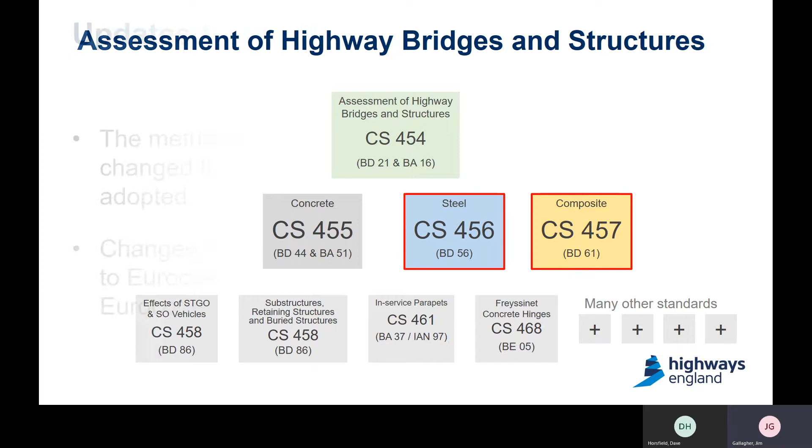The updates to BD56 and 61 didn't require major technical changes. The methods and requirements are largely unchanged or slightly tweaked to allow more general approaches to be adopted. Both documents include greater references to Eurocodes, and this will facilitate an easier transition to Eurocode assessment standards when they are published some time in the future.

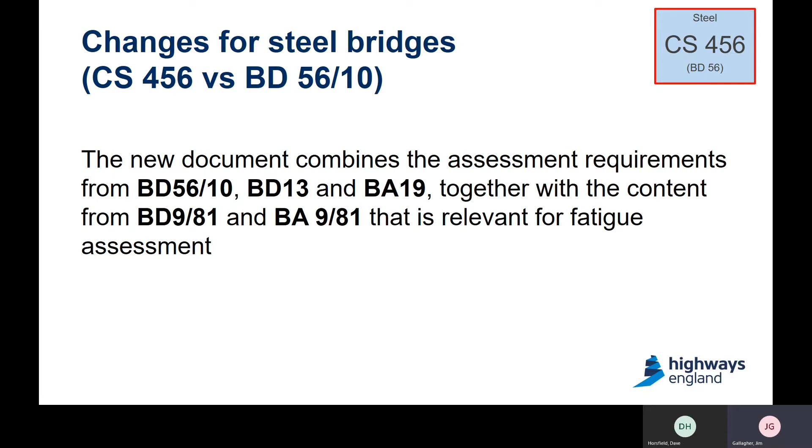CS456, the standard for steel bridges, contains a number of clauses and requirements taken from a number of previous standards, BD56, BD13, BA19, with specific extracts from BD9 and BA9 pertinent to fatigue assessments. The format of BD56 originally supplemented or amended clauses within BS 5400 Part 3. So it's been necessary to retain this link and mirror the styles on that.

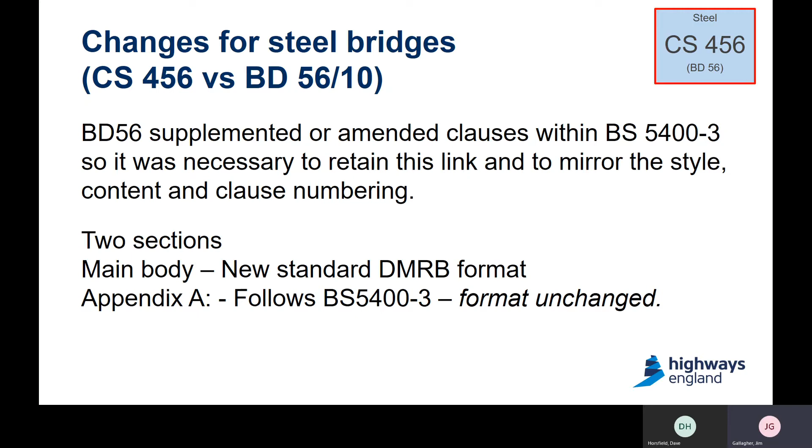And therefore the new CS456 has two main sections, a main body, which follows the format of the DMRB, and the Appendix A, which is largely unchanged from the previous version to integrate with BS 5400 Part 3. Some key technical changes on this. We have added some criteria to look at robustness, as part of the particular assessment standards. With notch toughness, we have strengthened the advice with regard to welds. They weren't previously covered by the standard and could have been overlooked.

Bearing stiffeners: BD56 was much more onerous than 5400 Part 3. Full bearing loads were used instead of the middle third, which is used in 5400 Part 3. This clause now follows the 5400 Part 3 requirements, except where the bearing stiffener needs to retain the stiffness over its full length, for example, as part of a U-frame restraining the compression flange. And with regard to criteria for inspection, we've consolidated the information in Annex I.

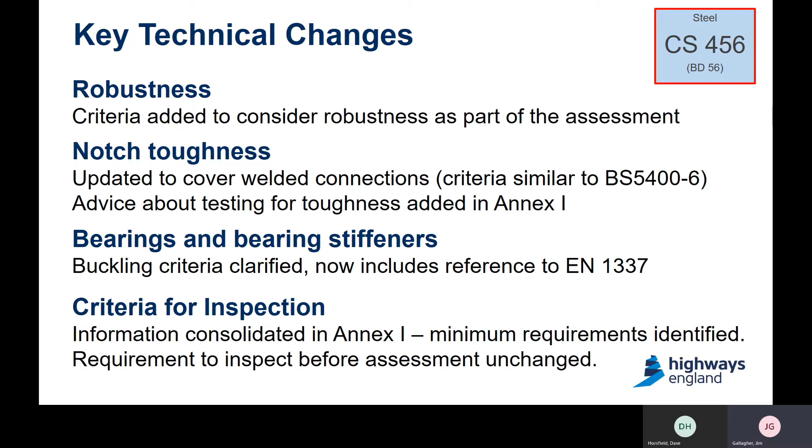We have also added and consolidated information on managing existing welds. The focus primarily is on the requirements, and those haven't changed at all. We're looking at a basic requirement to visually check the weld, concentrating on welds in critical tensile areas, which have to be visually inspected to confirm the minimum weld size, and we have added criteria for the critical tensile areas to be re-inspected and subject to NDT.

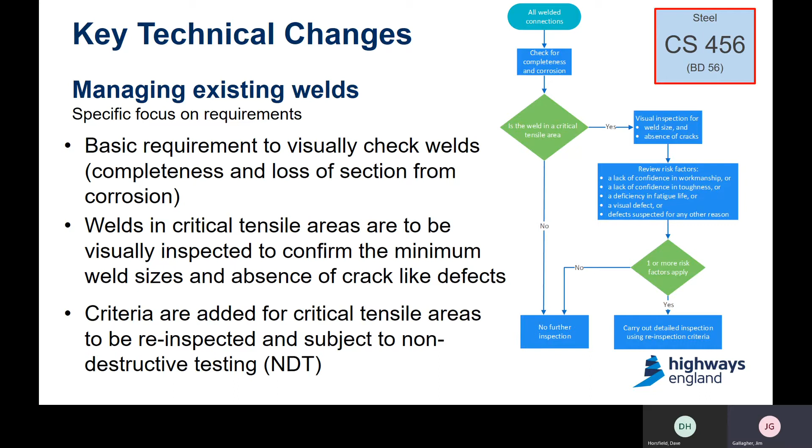Some of the methods in BD56 for crossbeams have been edited to improve usability, and a big addition to this is some additional clauses to allow for finite element analysis. We've also tweaked and simplified some of the language to allow it to be more easily applied, and removed the conflicting methods for shear lag.

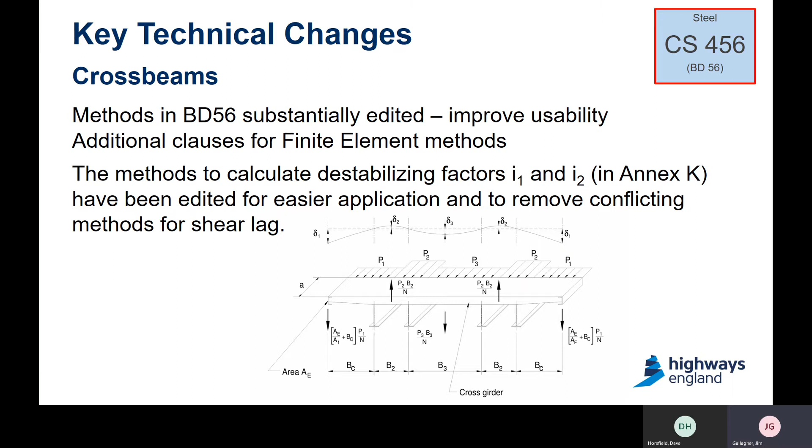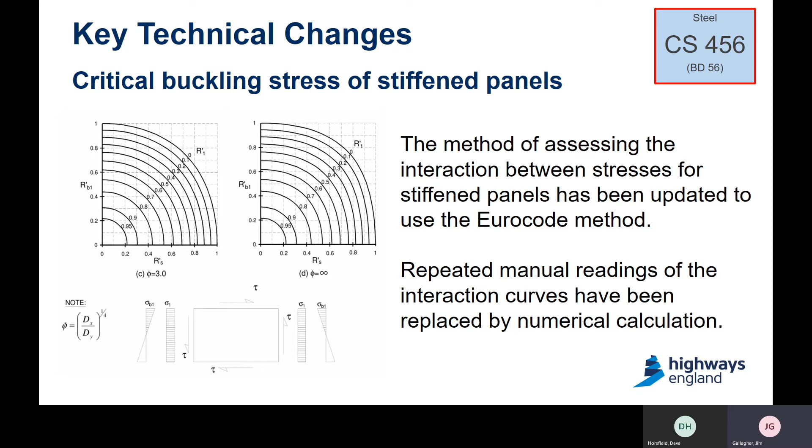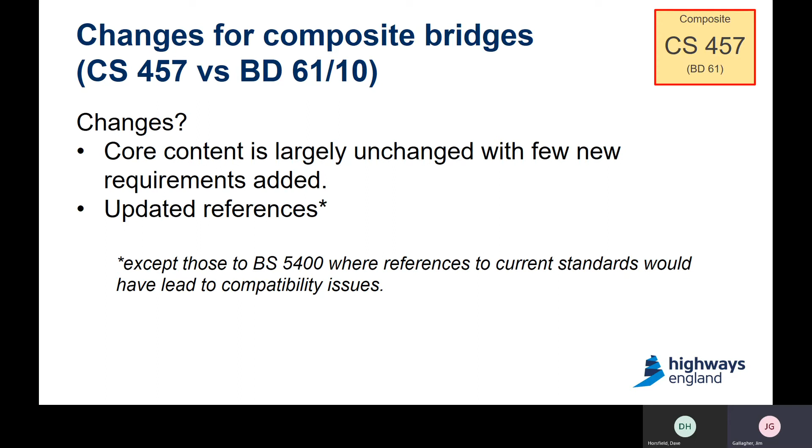On the composite standard CS457, which replaces BD61, the core content is largely unchanged. We have updated some references, except those that are particularly relevant to 5400, where there may be some compatibility issues.

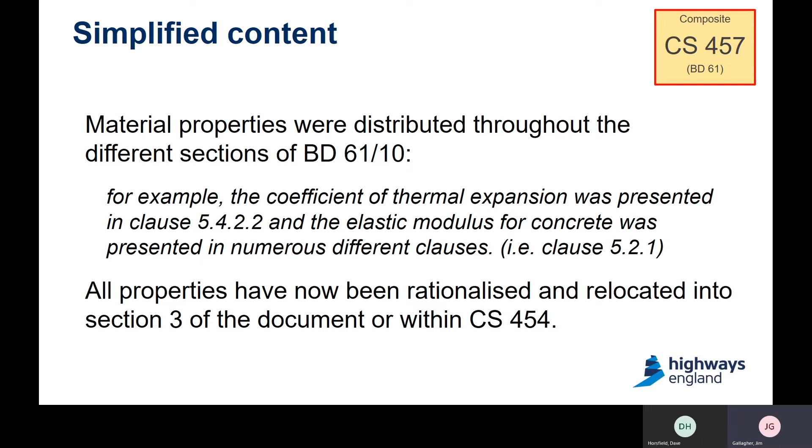Properties in previous BD61 were located at a number of different locations throughout the standards. For example, the coefficient of thermal expansion was cited in clause 5.4.2.2, and the elastic modulus was put in 5.2.1. What we've done is pull them all together, generally put them in section 3 of the document or within the CS454, the general standard for assessment.

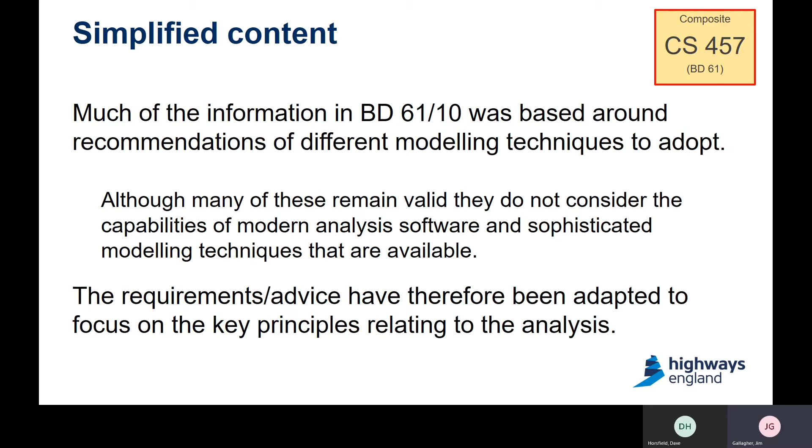We have rationalised part of the content within there because much of the previous content of 61 was explanations and recommendations of different modelling techniques to adopt. Now, although these remain valid, they don't really take account of modern analysis software. Therefore, we have cut down the specifics to look at the general principles, allowing designers to identify and use any particular relevant software that they think is appropriate.

Shear connectors. These have been included in clause 5.63, but a lot of the background commentary and derivation have been removed. It was previously included in BD61 for information only and only used where required by assessors. So there's actually no change to it, but it looks greatly different because there's obviously less information on that.

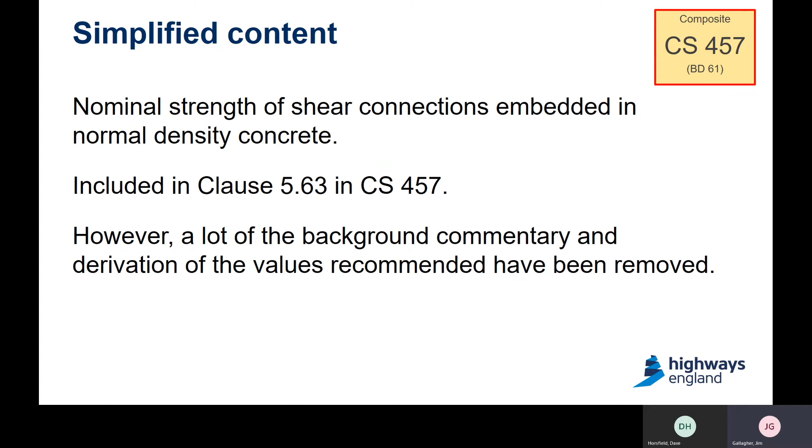Fatigue requirements. The requirements of shear studs are essentially unchanged. What we have done is clarify circumstances where there's a need to undertake fatigue assessment, and that really is where there's been a change of use, where the detail results in unusual, undesirable stress concentrations, or where fatigue damage has been detected.

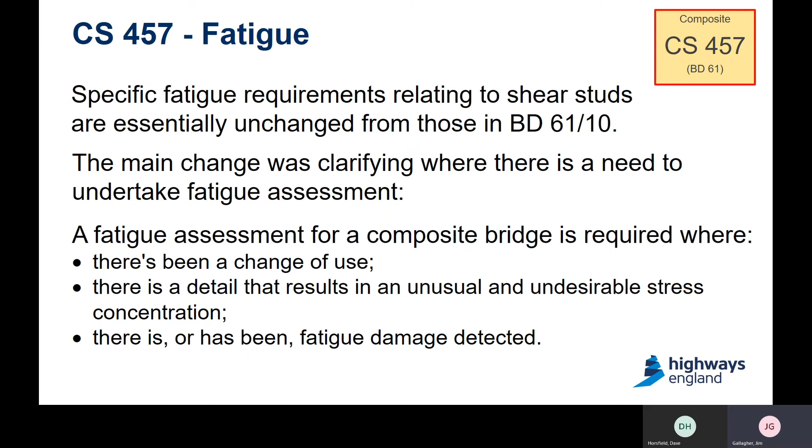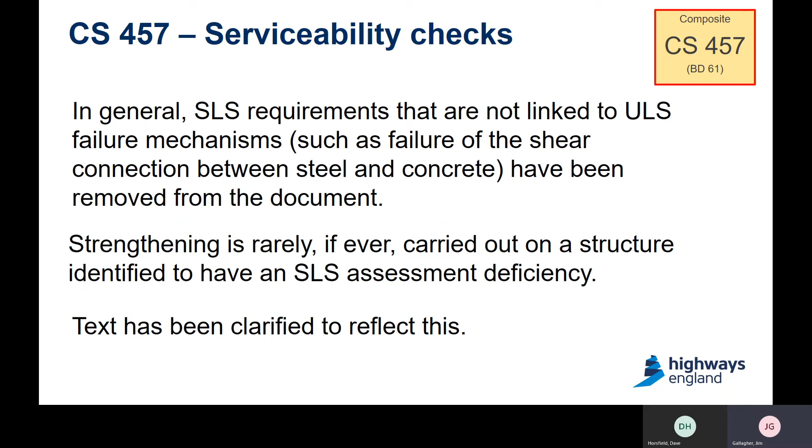With regard to serviceability, most of these have been removed. In general, SLS is not particularly linked to failure mechanisms on this, and strengthening is rarely, if ever, carried out on a structure identified to have SLS deficiencies. So the text has been clarified to reflect this. It removes any doubt that SLS failures rarely warrant strengthening works.

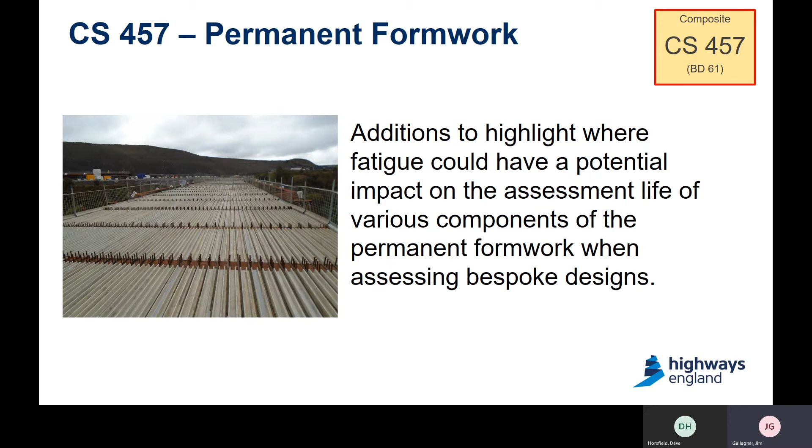Some changes to the permanent formwork requirements. We have highlighted where fatigue could have a potential impact on the assessment life when assessing particular bespoke designs that have permanent formwork.

The old BD61 appendices have been altered as well. Annex A was removed, mainly because it's a serviceability requirement. The information retained in Appendix B and C provides information on simplified approaches that can be used to determine the critical buckling length. However, the main document was adjusted to highlight that elastic critical buckling analysis or a non-linear material and geometric analysis may give more favourable assessment results. So it's pointing designers to other methods.

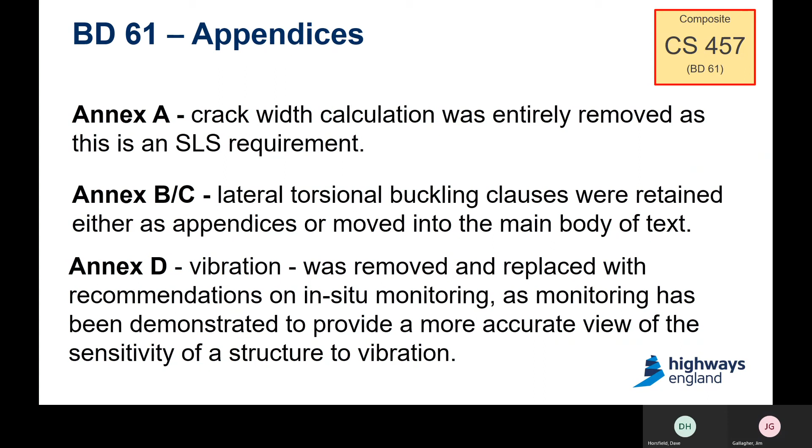Annex D on vibration was removed and replaced with a recommendation for in situ monitoring. Appendix E was removed and replaced with text within the main body of the document. Annex G was removed. It's useful information, but not really relevant for an assessment document. Annex H is now Annex C, and Annex I contained a set of flowcharts illustrating assessment procedures. Now, they were useful, but not really relevant for an assessment document, so it was removed.

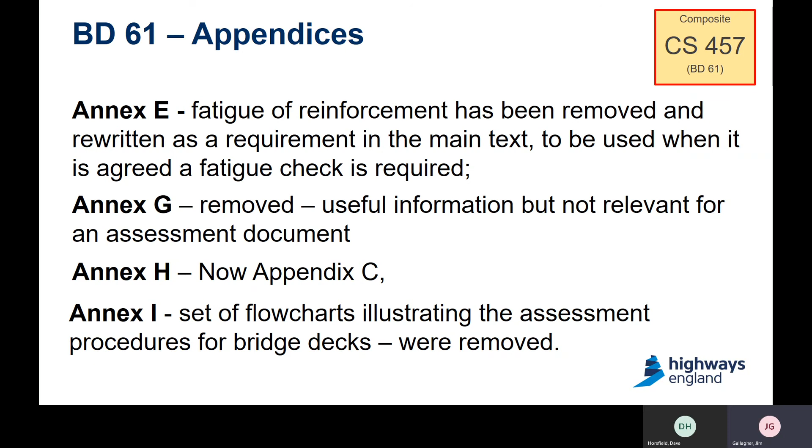Overall, the methods and requirements are largely unchanged or changed to allow more general approaches to be adopted and give the designer more freedom. The less relevant information has been removed, making the documents easy to use. The new format allows more freedom to designers to select the appropriate methods, and that should allow them more opportunities to take better account of better software and any changes that have occurred over the past few years, which will also facilitate the transition to Eurocode assessment standards when they do come in.

That wraps up the main changes to these particular documents. It's part of an overall update to the DMRB. We have communicated a number of changes on this. There have been a number of bulletins put out. You can find out more information on the Highways England Innovation Hub pages. There'll be a number of webinar tutorials like this one given by the technical leads of each discipline, and there will be a number of presentations and items in the technical press.